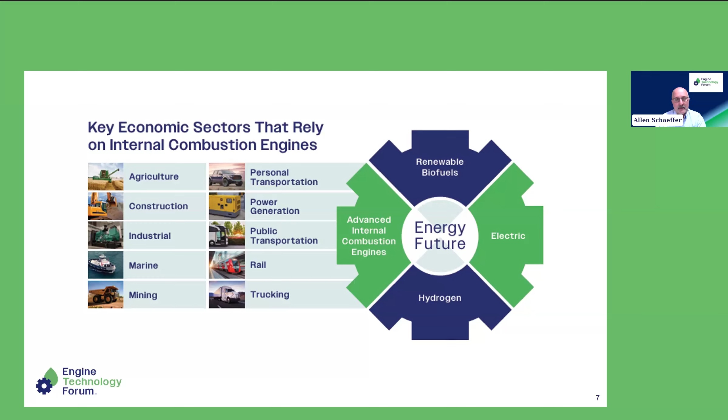Zeroing in on the sustainability of internal combustion engines a little bit more, how do we think about those in the future? Today, we know that they have increasing efficiency, they achieve near zero emissions, they're able to use renewable and low carbon fuel capabilities, and as you're about to hear, one of the key attributes is also their remanufacturability and rebuilding ability. So these engines last a long time, and that's a high value as you're about to learn.

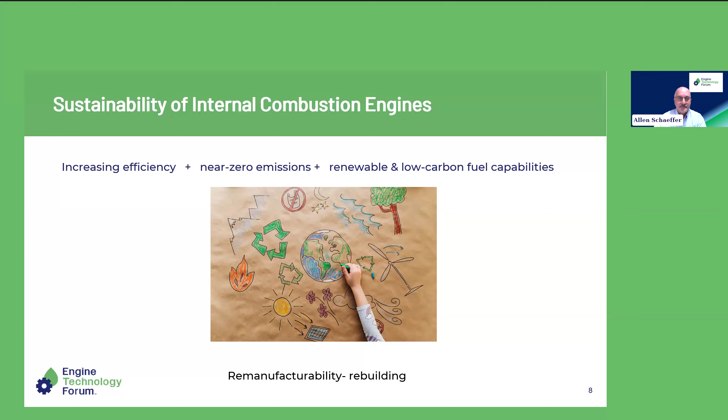Today's session is going to cover these topics, including how remanufacturing contributes to a circular economy, what role do component manufacturers play in remanufacturing, and we'll also get into how emissions control technologies factor into remanufacturing.

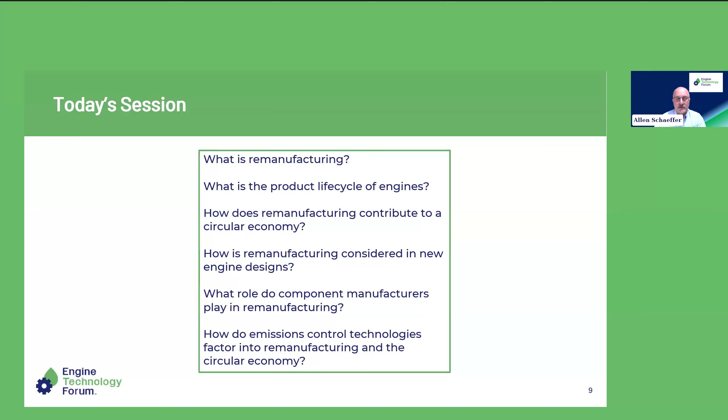So without any further ado, let me introduce our speaker lineup for today. We are delighted to have representatives from leading companies that are working in this field, and we're going to hear from each of them momentarily. Our session today will last about 75 minutes. We'll have plenty of time for questions. At the end, we start to collect questions right from the beginning, so feel free to enter your questions in the Q&A feature on our Zoom meeting platform here.

So without any further ado, let me begin our program by welcoming Patricia Covington from Cummins. Thank you so much, Allen, and good morning, everyone. It's an absolute honor to be with you today to talk about the remanufacturing and reverse logistics process for Cummins.

So I'll start, if you go to the next slide there, Allen, I'll start with a little bit of a history lesson in terms of how remanufacturing started for Cummins.

So Cummins' involvement in remanufacturing actually began in the late 50s. And it was in response to technical field and service problems with fuel systems and air compressor components.

So the initial effort began with Cummins factory repair of returned goods, which were essentially rebuilt in the Columbus, Indiana area, and later sold back to our distribution system. The company found that it was more cost effective and more efficient to establish regional rebuild capability. And thus 5 locations were selected.

It was in Arlington, Texas, Charlotte, North Carolina, Los Angeles, California, Portland, Oregon, and San Francisco, California, all parts of our distribution network at the time.

By the early 60s, Cummins began to evaluate centralizing the rebuilding capability. Our leadership approved what was then a pilot operation in 1966, choosing locations in Memphis, Tennessee, Los Angeles, California, and Chicago.

As things continued to progress, we found a few factors that led us to expand and consolidate the operation even more. It was a good business opportunity to make money, but also to lower customer repair costs and downtime, and that was really critical. So we thought about how to establish better standards and centralize a little more.

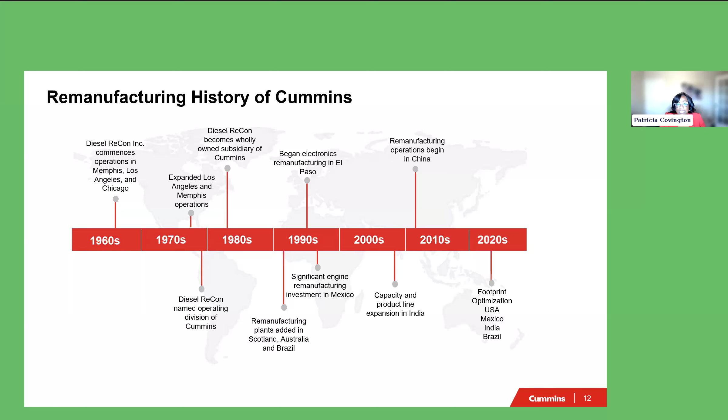So if you go to the next slide, we'll talk a little less about Cummins history and a little more about the actual remanufacturing process.

So when you look at remanufacturing, it all starts with a new engine, a new component, a new product. This process map illustrates our repair process based on when a product reaches the end of its useful life. That's when it enters the remanufacturing cycle.

I'll go top down on the graphic. One of the most critical elements is what we call core. It is essentially the dirty product. Once that repair cycle starts and the product has reached the end of its useful life, we want that dirty product back, that dirty core back. That dirty core is the most important element.

For us, there's a huge reliance on what we call reverse logistics to get that core back from our customer base and to make it easy for them to return it. Once it gets back into our possession, we're able to get that core disassembled, get it cleaned, and it then enters the official remanufacturing process.

Whatever that salvage technology is for that specific component, we run that process. Our engineers are always happy to work in the remanufacturing space because, for many of them, it's a playground to think about the different salvage technologies required depending on what the component is.

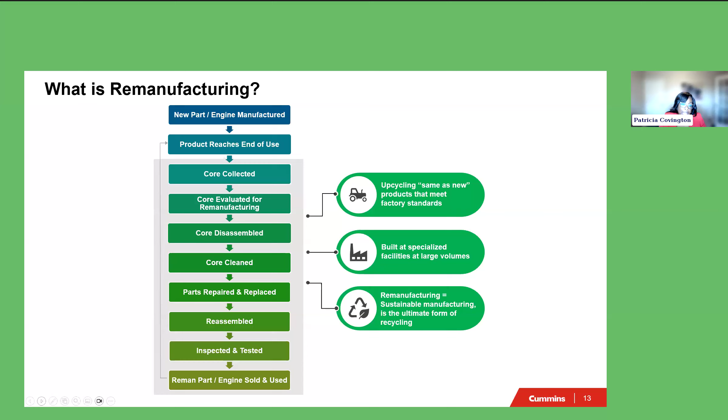If you go to the next slide, I'll talk a little about how this has helped us in specific times in terms of mitigating supply chain risk. Not only is it a really good business opportunity, it is most important for our customers.

When you think about how it buffers against disruptions in terms of product availability, whenever suppliers are constrained, it gives us an opportunity to think about how to utilize our remanufacturing technology to offset whatever supplier capacity may be, whether external supplier capacity for new components or our own internal manufacturing capacity.

So it gives us an opportunity to have shorter lead time than the new product, and lower raw material consumption — again, back to the environment. We want to make sure we're always doing the right thing, so as much as we can remanufacture, the better for the environment, because we're not relying as much on raw material.

More specifically, during the pandemic period, I don't think it's a surprise to anyone, a lot of us had constraints — a lot of our suppliers were significantly constrained. So it gave us an opportunity to think about some product that we were not remanufacturing, or did not have plans to remanufacture as soon as expected, but we were able to quickly get the product into the remanufacturing process and offset.

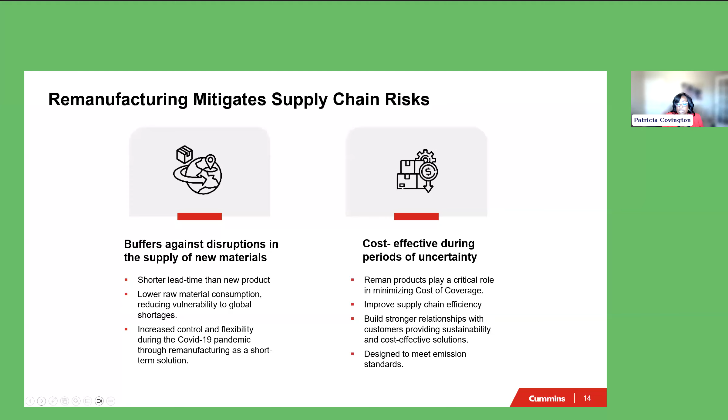There's an early stage where it's not in remanufacturing yet, but we want to get that dirty core back. So we want to release that remanufactured product early on so that we can start the core collection process. Depending on the volume and usage out in the field, we will start to collect that core, and for a period of time we will build a bank—enough to make sure we're at least 50% usage for whatever that component or engine may be, so that we can offer customers the price point that we prefer and that they prefer and ask for.

Once remanufacturing starts, it can be 12 months, it can be 24 months. It's solely dependent upon our ability to collect the core from the field. We will then start the remanufacturing process, and that reman process often starts before the end of new production. So in the example of an engine, new engines and reman engines can be manufactured at the same time. At any point where it becomes mature, the new engine platform may cease to exist and go on to a better, newer engine, and we will still have the ability to offer those customers repair parts and the whole reman engine for a period of time.

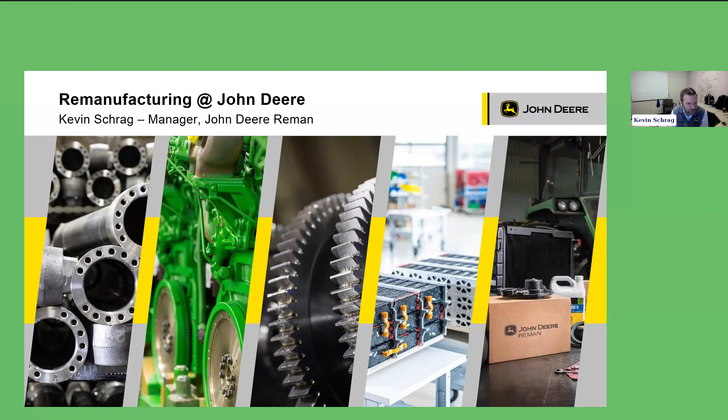Go ahead and go to the next slide. Really what I want to discuss over the next 10 or so minutes is just give a very brief overview of John Deere and where our power systems and our Reman business fit within John Deere overall. And I want to talk about the definition of Reman, how we define that, and the value that Reman brings to our customers.

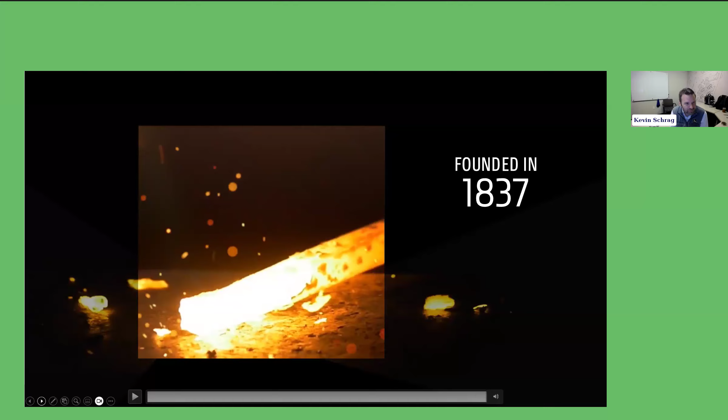First of all, John Deere. John Deere was founded in 1837 by John Deere, the man, and it started really with the innovation of a self-scouring plow that revolutionized agriculture. Since that time, John Deere continues with a legacy of innovation in multiple different segments. If you go to the next slide.

Today, John Deere is over 100 locations. This includes factories, engineering centers, marketing centers, very much a global business with the intent to continue to grow globally. We are nearing 80,000 employees, really with an aligned objective and mission of providing equipment for our customers to feed and clothe and develop infrastructure for a growing world, a world of 8 billion.

So that's a bit about John Deere.

John Deere Power Systems is a division within Deere & Company, and Reman rolls up under it, but it's really a division focused on how we power our machines and equipment. That's anything from internal combustion engines, which is really the history and will continue to be an important part of the portfolio, to drivetrain, axles, electric drives as well. More recently, with a majority stake acquisition of a battery manufacturer, Kreisel Electric joined John Deere a few years ago, so we're continuing to invest in what the future could look like with battery electric as part of Power Systems, and Reman falls underneath that.

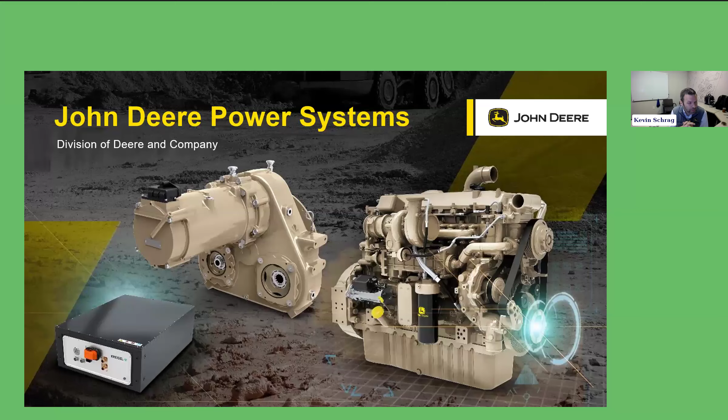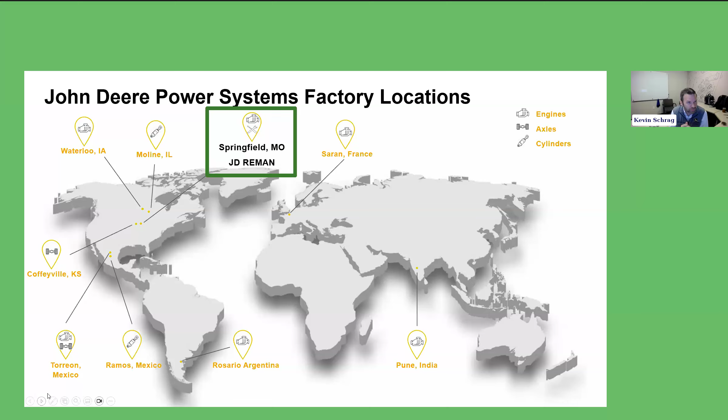The global footprint of our John Deere Power Systems business is shown here, but all of the remanufacturing is done out of our Springfield operations in Springfield, Missouri, serving our customers across the globe from Springfield. Within Springfield we have multiple different facilities.

We're actually operating out of 6 different facilities. We have an electronics business, and electronics remanufacturing is certainly unique compared to heavy equipment. We have our main facility where we do machining, assembly, test, paint, and pack. We have our global core center where we receive all of the core. Patricia mentioned the process of core, and how we manage core is really critical to the value that Reman can bring. Then we have 3 additional warehouses that are all about core management, core warehousing, and receiving.

Core is what makes Reman unique. It's what fuels the ability to offer a lower priced offering for our customers, and it's really critical to the Reman business. We operate in Springfield with just over 500 employees, around 660,000 square feet, and we continue to invest in Reman. We're going to be breaking ground on a 120,000 square foot expansion of our global core center, so we're really excited about continuing to invest and grow in this space.

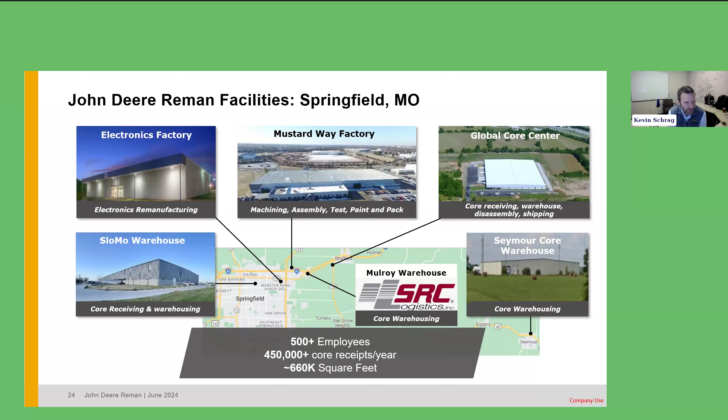So switching gears, I want to talk a little bit about what is remanufacturing. Patricia went through the process from new product all the way to Reman product. It's really important that we have an aligned definition of what remanufacturing is, because it means a lot of different things across the globe.

The Remanufacturing Industry Council is an industry-wide group that's come together. The RIC has 3 main objectives: one is collaboration across member groups, the second is education, and the last is advocacy for how we can expand remanufacturing overall. It's made of members that are much broader than just heavy equipment, remanufacturing anything from furniture to ink cartridges, really across the whole broad spectrum.

Several years ago, the RIC put together an ANSI standard to drive a clear definition of what remanufacturing is. I won't read the full definition, but essentially it's a comprehensive process that delivers like-new performance, or in some cases better than new, and also delivers a warranty equal to or better than the new product. It's important that it's not the same as recycling, repairing, or rebuilding. All of those have a place, but remanufacturing is different. This definition was intended to educate, but also to drive accountability. In my view, it holds remanufacturers to a standard to ensure we deliver to the expectations of remanufacturing.

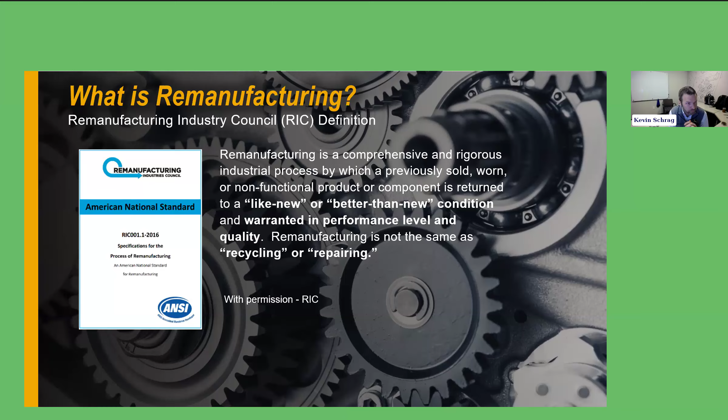A bit more about remanufacturing. One of the challenges we have is just the complexity. This is the Deere product portfolio for Reman. You can see engines in the upper left, but anything from fuel, transmissions, axles, hydraulics, electronic components and displays, engine control units and receivers, and rotating electrical components like starters and alternators, along with turbos and additional fuel components.

So it's very broad. I think one of the unique challenges, even if we focus on engines, is that our objective is to serve the customer throughout the life cycle. We're offering remanufactured engines for the latest Final Tier 4 emission standards, the latest equipment out there, but we also offer support all the way back to engines put on machines in the late 70s, with the intention of keeping customers running and effective throughout the life cycle of the product.

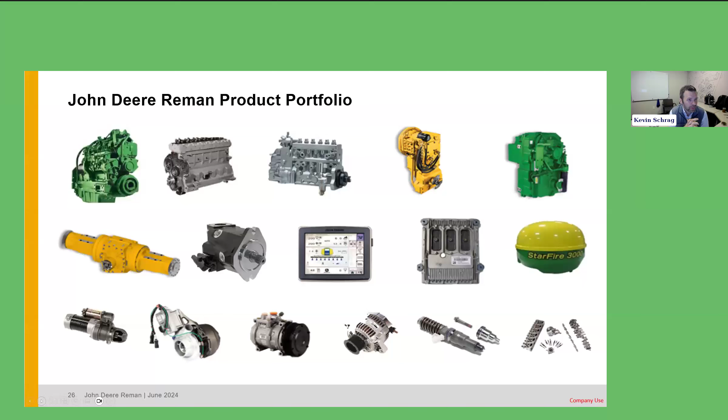For the customer, the value is primarily around offering a lower priced alternative to keep their equipment running. So generally, we'll price our products up to 30% less than a new equivalent. Of course, we're able to do that through the usage of core and the recycling of that material. But importantly, it's not just a lower cost. It's a lower cost with the confidence that comes with a like new product, the confidence that comes with a product that's warranted to the like new. In some cases, we actually offer a better warranty than the new equivalent would get. And certainly the confidence of having the dealer and John Deere backing the product.

For the dealer, there's also tremendous value. And one of the biggest values that our dealers see with Reman is enabling them to grow their service capacity. We consider Reman a force multiplier. By using a complete solution, be it a complete engine or a complete transmission or axle, they're able to first get the customer up and running quickly. But secondly, the technician that would otherwise be rebuilding or taking time could serve a customer that may not be served without a Reman solution. So tremendous value for the dealer.

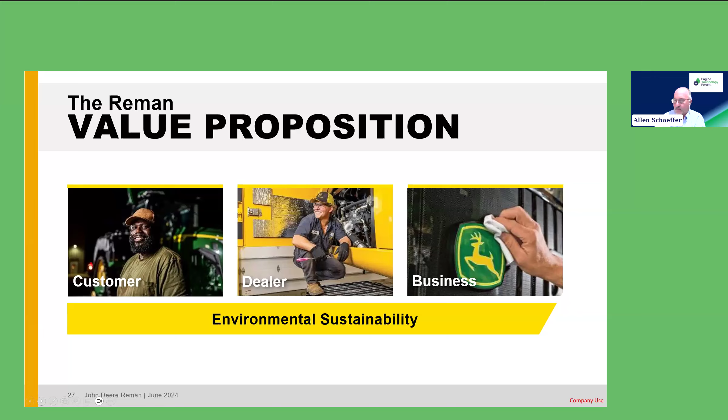Yeah, good morning. Good morning, everybody. I guess it wouldn't be a Monday if I didn't have some problems with my computer, so I joined a little bit late. I don't know if I missed any introductions or not, but apologize for that.

But I'm Jeff Sutherland. I'm the drivetrain product manager for Caterpillar Reman Division and the chief engineer. Been with Caterpillar for 30 years. This is my 30th year and 10 years in the remanufacturing division.

And today I wanted to speak a little bit about a practical issue we have in remanufacturing that I'm sure many of the companies involved in remanufacturing are familiar with. And that is our ability to influence design practices as much upfront as possible. Caterpillar, you heard from Kevin and Patricia, they have large companies as well, worldwide footprints. Caterpillar's no different, and we literally have thousands of engineers or other employees in Caterpillar, whether it's in purchasing, that can make decisions every single day that affect our ability to remanufacture a product. And so we spend a lot of time and effort in the remanufacturing division trying to influence those design situations or design decisions as much as we possibly can.

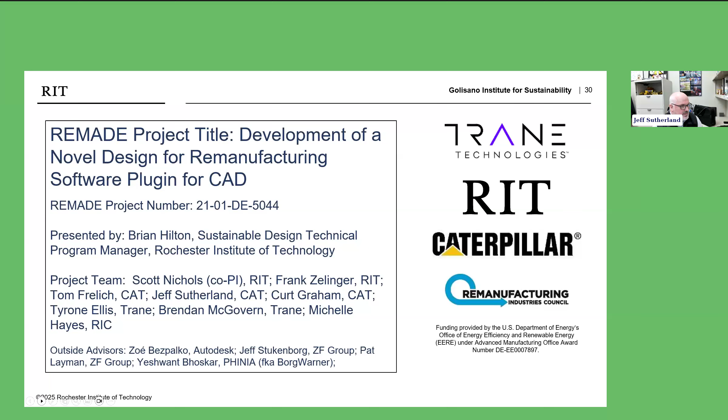So why is Caterpillar interested in this? Well, turns out a lot of the industry is interested in this as well. You can see the results of a survey conducted by the Remanufacturing Industries Council in 2016 that polled the industry on what's important, what are the most significant future issues, what are the most beneficial training topics needed, and you can see that design for reman, or topics related to design reman and core design features, rose to the top.

So it's not just Caterpillar that's interested in how we can get better at design for remanufacturing - the industry is interested in this as well. And that's why it was such a good fit for the Remade Institute, because that's meant to better the industry for everybody. The types of projects run through that are shared with members in the industry, and I think Remade has over 130 partner companies and institutions. So this is shared broadly and benefits the industry as a whole.

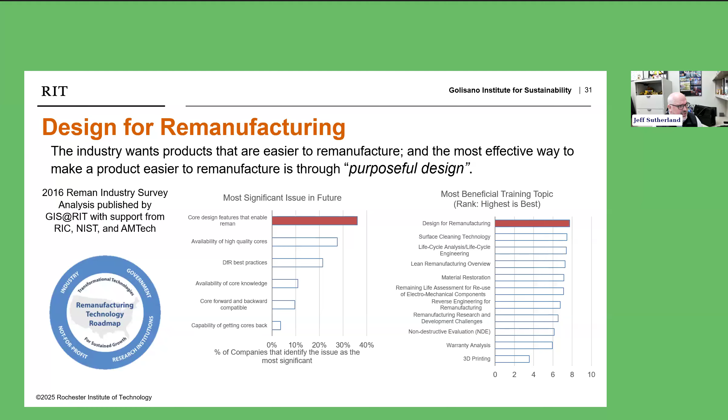Click to the next one. So Kevin mentioned the definition of remanufacturing - that's important, I'm not going to repeat that, but it's in there. Also important is why we need to design for remanufacturing. I spoke to it a little bit - oftentimes our ability to remanufacture something is limited by the decisions that are made, and oftentimes they're not forward thinking, and they can potentially hinder our ability to remanufacture down the road.

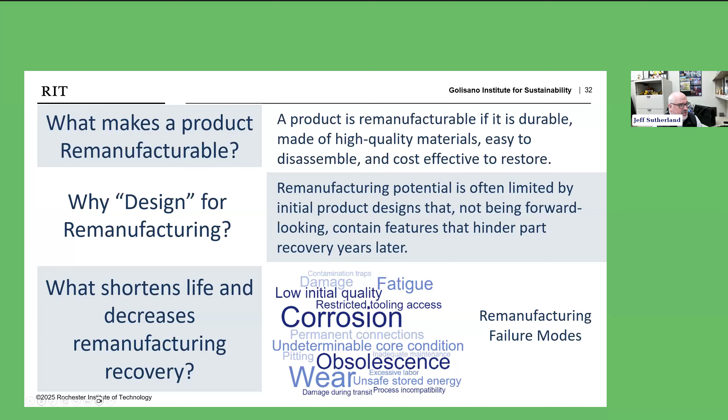So that's the purpose of this project we've been a part of, and I'll take you a little bit through it. It really hinges on understanding, predicting, and mitigating the failure modes associated with remanufacturing - corrosion, fatigue, wear, those types of issues. How do we account for those upfront and make sure they don't hinder our ability to remanufacture in the future? They do this - if you could skip to the next slide, please.

So we do this essentially by having the software interrogate the engineer's design using a hierarchy of design principles. It looks at the design and steps through a series of questions that they want the design engineer to answer, and it starts with: can you prevent the failure modes that we talked about earlier?

For those of us in remanufacturing, the best way to remanufacture something is not to have to remanufacture it. What do I mean by that? If when we get our core in, we were able to just slap a label on it and resell it to our customer, that represents the maximum value we'd ever be able to extract from that core. Every time we touch that core from that point forward, we detract from that value. So obviously the most cost-effective way for us to remanufacture something is to be able to just reuse it. We want to interrogate those designs upfront, make sure they can be reused if possible.

So that's designing for infinite life, things of that nature. It helps us do that. That's not always possible, so you start stepping your way down that design hierarchy, and you try to minimize those failure modes to an acceptable level so that at least they're making it through one life.

That's not always possible as well. So then you might want to consider relocating that failure mode to another less expensive part to repair. And if again you keep going down the hierarchy, that's not possible as well. Sometimes you just want to be able to predict it so that we make sure we're replacing components prior to failure. And then finally, kind of the last resort, we want to make sure we can restore it.

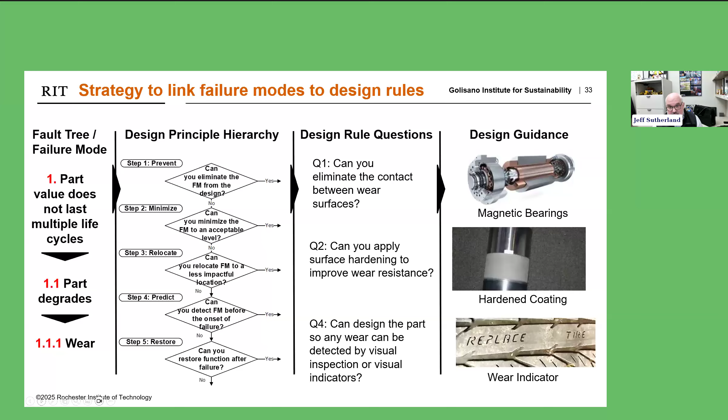That's where you start to get into some of the more technical solutions we have for restoring and salvaging products. But the intent of this software is to take an engineer through that design principle hierarchy shown here to help them vet their designs and account for the ability to remanufacture upfront. It's a very structured process that it takes you through as you're going through your design. The next slide gives you a practical example of that as it applies to a diesel engine rocker arm assembly, which many of you are probably familiar with.

The first thing we want to do is try to prevent that wear from happening. One example shown here is, kind of high tech, maybe a magnetic bearing completely eliminating any wear would be the first step in that hierarchy. If that's not possible, then you want to minimize that wear, make sure you have hardened surfaces, etc. If that doesn't do the trick, then you want to try to relocate that wear to a less impactful location—can you have a sleeve in that design that's easily replaceable if it wears out, versus having to replace the entire rocker arm?

And then finally, can you restore it? Again, that's the last step we want to consider. You need to understand, do you have enough tolerance in your design, enough material, to be able to machine out something and put another surface in? Can you repair it with some additive manufacturing processes, etc.? That's the intent of the software program—to walk you through those design considerations up front, as early as possible in the design process.

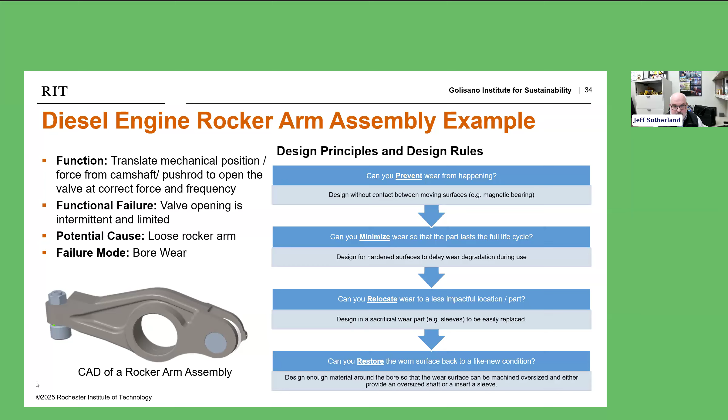The intent is to be as proactive upfront in the design process as we possibly can. So I liken it to looking over the shoulder of the design engineer and being able to whisper into his ear to think about some of the considerations for remanufacturing. We're really excited about this—I think it has the ability to make a huge difference in our ability to design products for remanufacturing in the future.

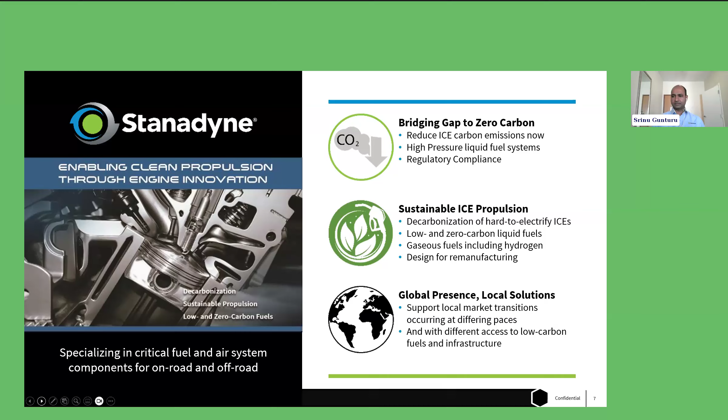So I'm going to talk more about the circular economy, why that is important. I think Jeff, Patricia, and Kevin covered some of these slides, so you'll probably hear some repetition of the circular economy. As we are innovating for the future, ensuring the technologies are environmentally responsible is more important than ever, and that's where life cycle analysis is very important, and circular economy comes into play.

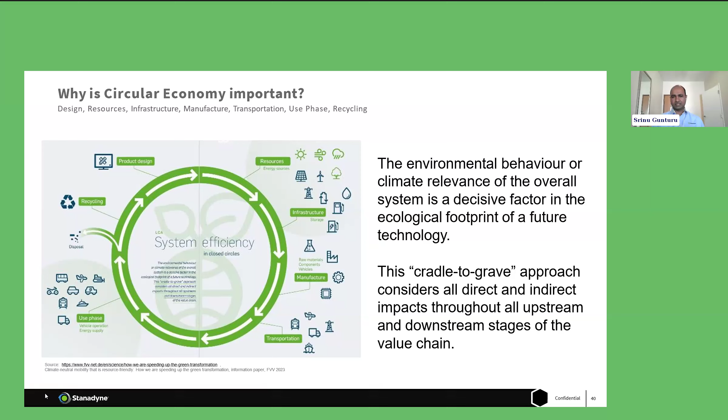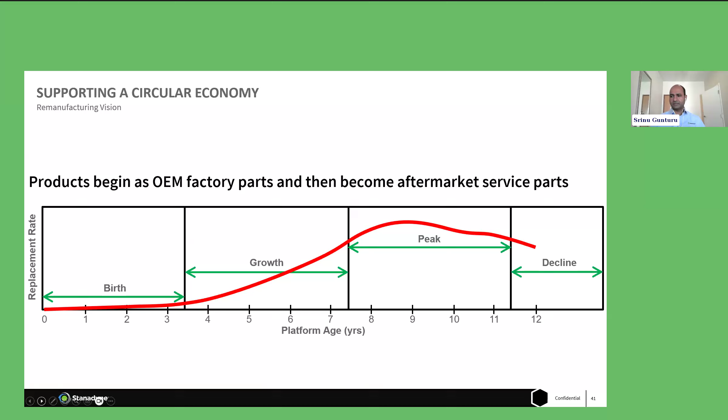So how do we do it at Pure Power? Previous slide.

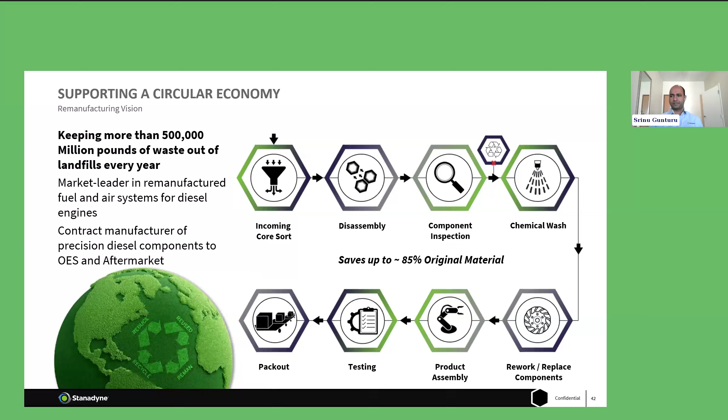It's the same with OEMs — for their engines, sometimes the injector or pump needs replacing, so they just buy a brand new one, even though that brand new pump or injector is actually a reman product. In other words, their reman engine is fully a reman engine, with all the components also being reman products.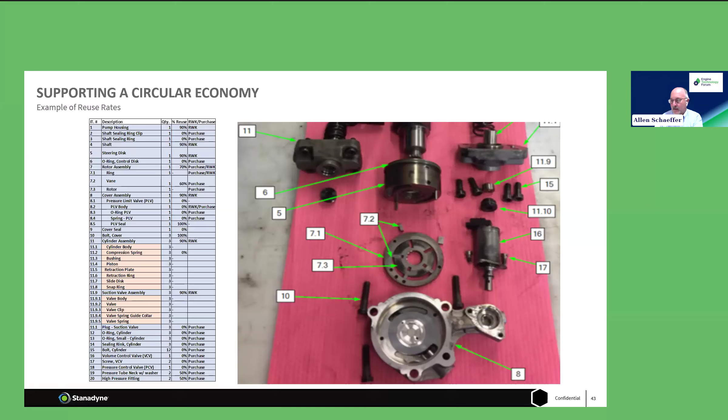Good morning. Thanks, Allen. Pleased to be with everyone today. I'm going to round out today's session by talking about the back end — literally how exhaust gas emissions after-treatment is handled, and how we look at doing that in a way that is sustainable from a raw material and embodied energy point of view.

Next slide, please. Just to give you some insight into how Johnson Matthey is structured, we have 4 businesses.

Our clean air business is the one that supplies automotive emissions control catalysts. Catalyst Technologies specializes in process catalysts for producing things like chemicals and fuels. Hydrogen Technologies makes components for fuel cells and electrolyzers to produce green hydrogen.

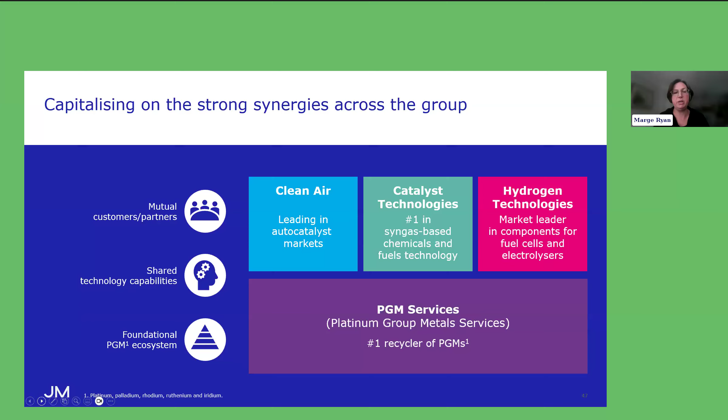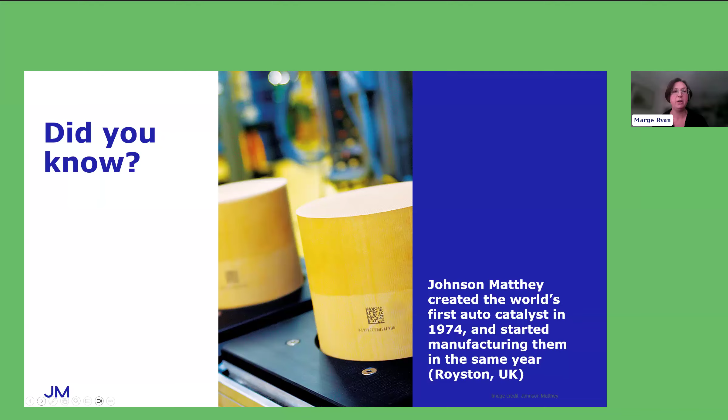Just establishing our credentials, Johnson Matthey actually created the world's first commercially produced auto emissions catalyst in 1974, and started manufacturing them in the same year at our site in Royston in the UK, and we are still a leading provider of those systems.

One of the key elements in minimizing the use of virgin materials is to design for durability, and that's one of the key ways in which we ensure sustainability here. These emission control catalysts have to last for as long as possible, so we design for that. A catalyst, by definition, increases the rate of a reaction without itself being consumed, so you want to use materials that are going to stay put and stay active in these systems for the legislative life that it has to perform. That is typically why platinum group metals see so much use here.

Typical design varies depending on the OEM, but for a diesel fueled vehicle, the typical emissions after-treatment design is a diesel oxidation catalyst, followed by a diesel particulate filter, followed by selective catalytic reduction of NOx, nitrogen oxides, followed by an ammonia slip catalyst. These all address different pollutants in the exhaust stream. The DOC, the DPF, and the ASC tend to rely on PGMs as catalysts, and it's just the SCR that makes use of other metals for catalysts.

Particularly with modern heavy-duty diesel after-treatment systems, designing for durability is really a key challenge. It's not easy to do, but we have to do it. We have to achieve high mileage without parts replacement or with minimal parts replacement, and with good maintenance these systems should perform well beyond the warranty and legislated mileage period, which in the case of heavy-duty diesel vehicles is considerable.

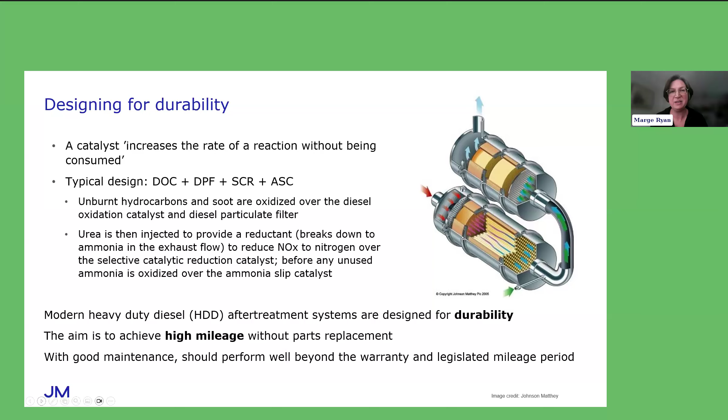Here we really have to design for regeneration. These DPFs capture the unburnt hydrocarbons, that's soot, and the inorganic particles, which is ash. The filter is literally trapping these solids and filling up with them. The soot can be burned off, which typically requires a higher temperature than normal running. Either that happens periodically in normal running at very high engine speeds, or through a managed event through the engine control system, periodically having regeneration events to burn off the soot. That is catalyzed to promote that oxidation reaction as efficiently and quickly as possible.

Ash, as you'll know from your own barbecues, you can't burn that off, it remains. So we design the filter such that it is large enough to contain the volume of ash generated over the legislative mileage period of the vehicle, and it'll fill up with that ash, but without compromising the filter's performance to keep reducing emitted pollutants below the legislated limit. What we have seen are quite innovative third-party methods actually looking at removing those DPFs, flushing them, and putting them back in for reuse.

So really interesting to see those innovative methods coming through for reuse. But ultimately, if we're talking about using PGMs, we do need to look at the circular economy of those. They are not geologically abundant metals. They're very valuable metals, obviously, but they're industrially incredibly important metals. So we do want to recover them.

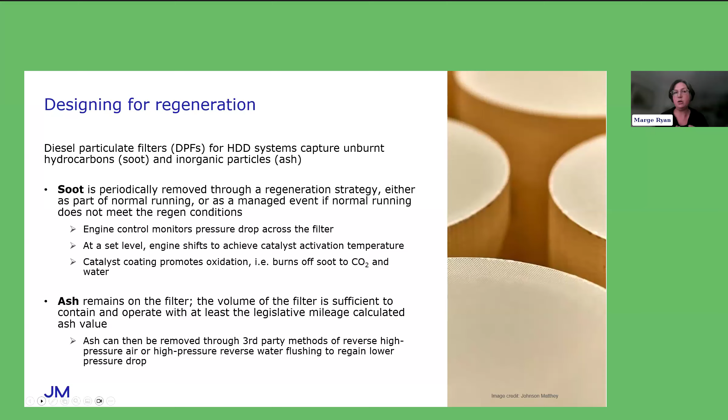The good news here, as we'll see on the next slide, is that recycling of platinum group metals from automotive emissions control is a very well-established process. It's been happening for decades, ever since we started making these things. We go into much more detail on this in our circularity white paper, which is available for free download on our website, so I'm not going to go into too much detail here.

Now, a closed loop won't work for the end-of-life platinum group metals. Those metals go on to the vehicles. The vehicles are sold all over the world, potentially resold multiple times. You can't have a closed loop there because the original purchaser and user of the metal does not retain ownership. So there we have an open loop, which again works very effectively.

We've got specialist collectors who go after the catalytic converters on end-of-life vehicles, or indeed catalytic converters that have been removed because they themselves are at the end of their life. They collect those and send them through to refiners such as Johnson Matthey to recycle the platinum group metal, recover it, and resell that metal again. Quite often that same metal is going back into new automotive emission catalysts - a really good example of circularity in action.

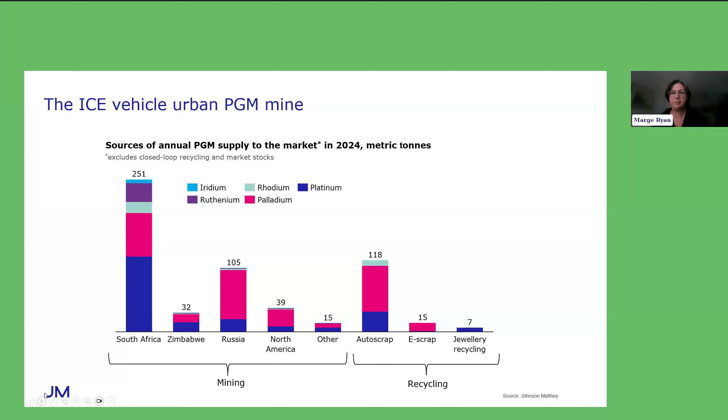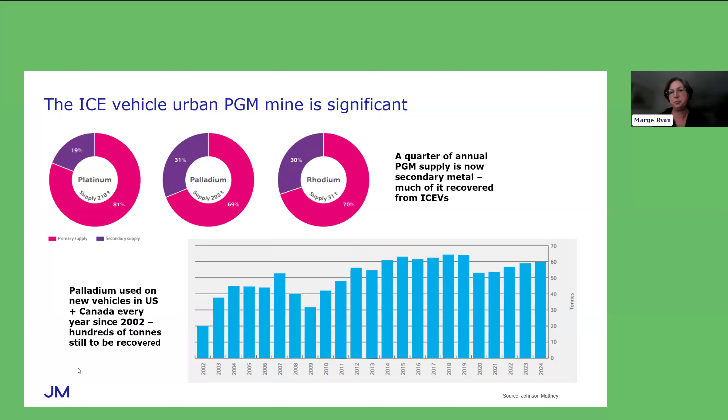However, when we look at the platinum group metals used on newly fabricated products, whether that's emission control catalysts or process catalysts or other products such as alloys, 60% of that is now recycled. So how does that stack up with what I've just shown you? It's a bigger number, and the answer is that it's the closed loop.

Many users of platinum group metals are now doing that in a closed loop, recycling their metal and remanufacturing their equipment or remanufacturing replacement catalysts using their retained platinum group metals. That's really significant when you think that a recycled gram of platinum group metal has up to 97% lower greenhouse gas emissions associated with it than virgin platinum group metal. So it's really significant from a sustainability point of view.

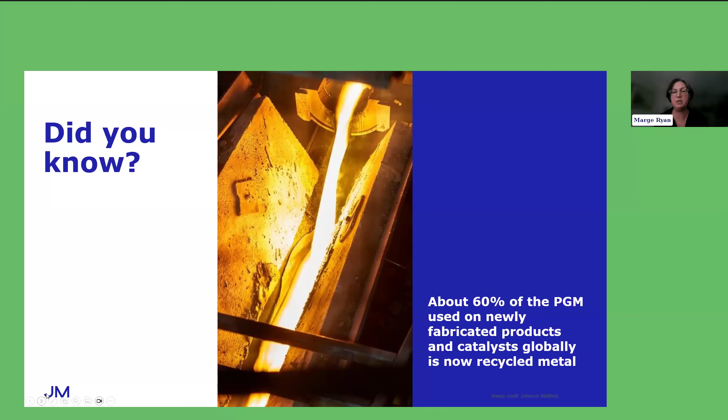Just to make the point here, that's why a lot of these sectors don't look that significant compared to vehicle after-treatment. It's because for things like process catalysts to make chemicals and fuels, or PGM alloys to make display glass or fiberglass, they are reusing that metal in a closed loop, so it doesn't appear on those charts because it's their own metal they're reusing.

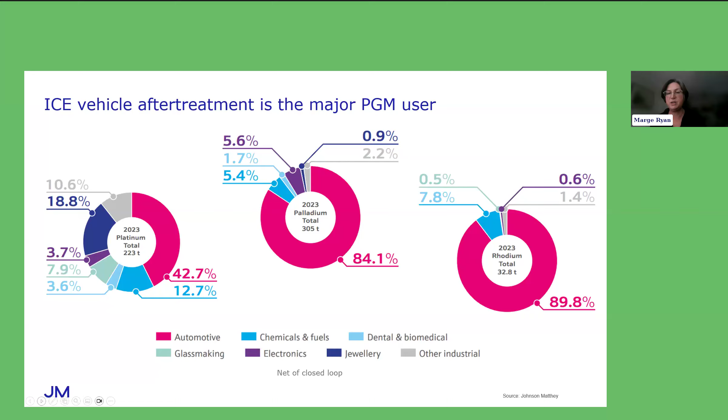On the next chart, just to make the point, we really want to work with our customers to close the loop wherever possible, to keep the PGMs in your hands for reuse as much as possible. It's obviously a really good thing from an environmental sustainability point of view, but it's also important for economic sustainability. So we really work with customers to try to close the loop wherever possible.

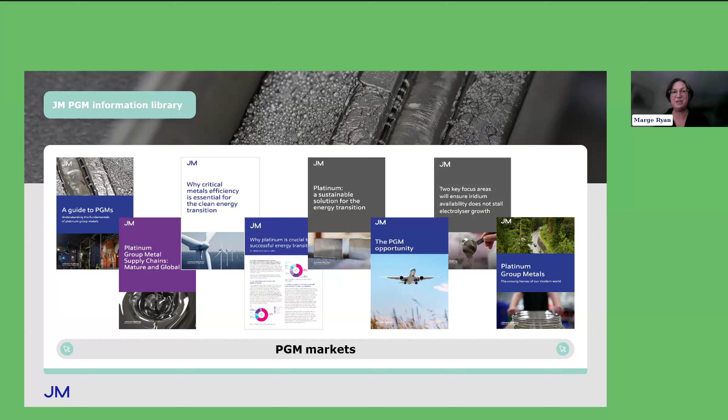Last slide from me. There's lots more information on platinum group metals if you want it on our website, and I think on the final slide I give you my email address. If you're interested in finding out more, please do get in touch. Thanks very much.

Very nice, Marjorie, thank you so much for that. Boy, it's really amazing how much is going back into the system there. I never realized the extent of it. It's quite impressive.

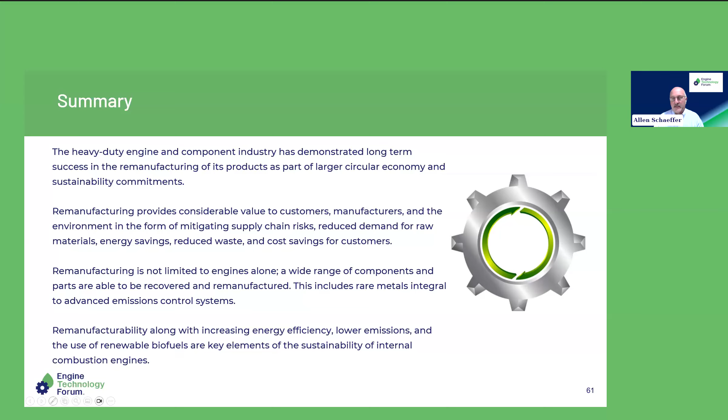Perfect, thank you so much, Patricia, for that answer. So just to wrap up here, I think you've seen a fantastic presentation this morning, great diversity of approaches to remanufacturing, but a lot of common thinking within the industry as well, not just for what we're doing today but really designing for the future. And the value proposition, I think, was outlined quite well. As we said at the outset, the very practice of remanufacturing, to the extent that it's taking place today and continues to grow, is a key aspect of the sustainability of advanced internal combustion engines in the future.

So really appreciate you all kicking off your week with us. We have another session coming up in May that's going to look at new manufacturing and put a spotlight on how that's done—what does it take to build America's advanced internal combustion engines? We hope that you might be able to join us for that.